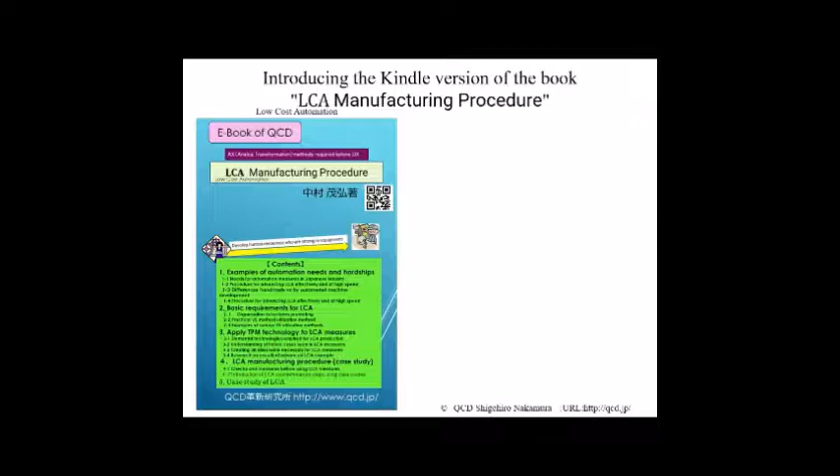Currently, DX and IoT measures are active at many companies. By making full use of advanced AI technology, it has become extremely easy to automate the labor that engineers used to make in factories. However, there are some cases where advanced expensive automation equipment, product and technology support, size and maintenance are not flexible, and it costs a lot.

On the other hand, the LCA countermeasure approach, as AX, analog transformation, is performed using the manufacturing mechanism and basic principles, and since it is based on the basics of manufacturing technology, there are few problems with DX and IoT countermeasures. In particular, I expect that it will be widely used because it is an effective approach for human beings to strengthen our analytical ability and creativity in product manufacturing.

At this time, Mr. Shigehiro Nakamura has published a Kindle book on this aspect, so I would like to introduce the main points.

This figure shows the result of a survey of management issues introduced by JMA at the end of 2021 in the issues of the production department. As you can see, first place is quality, 35.4%. Second place is IoT-related measures, 30.0%, fourth place is improvement of production technology development capability,

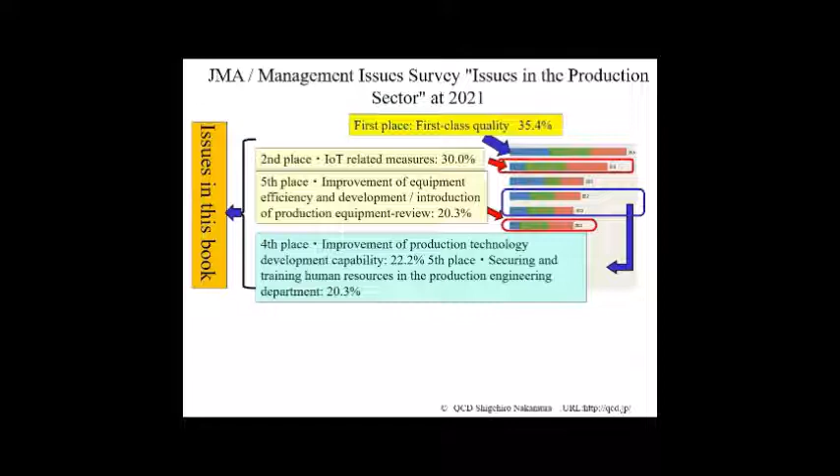22.2%. Fifth place is securing and training human resources in the production engineering department, 20.3%. Fifth place is improvement of equipment efficiency and development/introduction of production equipment review, 20.3%. This survey reveals a high need for automation and equipment measures in the manufacturing industry.

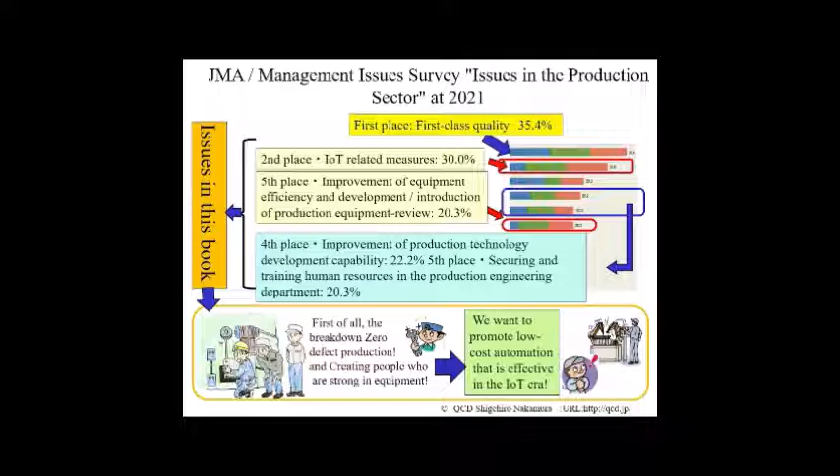At conveyor belt sushi shops, peeling of onions is also active in a similar manner. The inexpensive automatic machine Tamajiro, about $200, that processes onions in about 4.2 seconds is a facility developed by Mr. Jiro Kobayashi, the chairman of the famous Western food chain Kitchen Jiro in Japan.

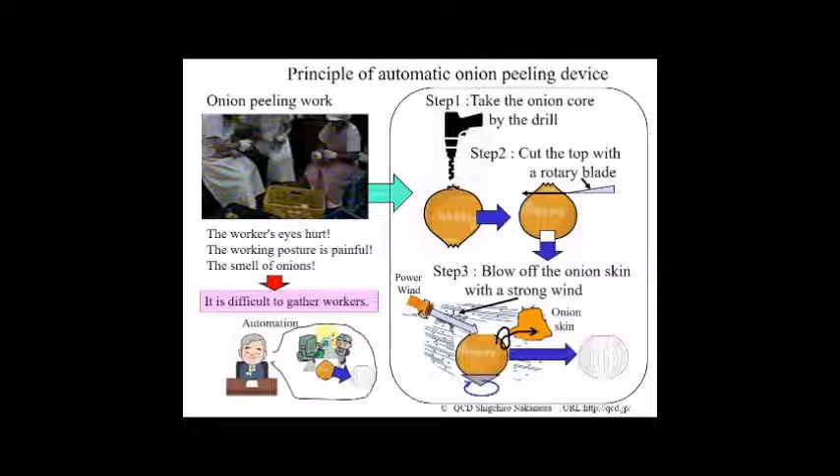The development of this onion peeling machine was a great deal of work because it was done by a complete amateur. For details of this development, please refer to the book, and the procedure for developing this kind of equipment in a shorter period of time and at low cost is introduced in the book.

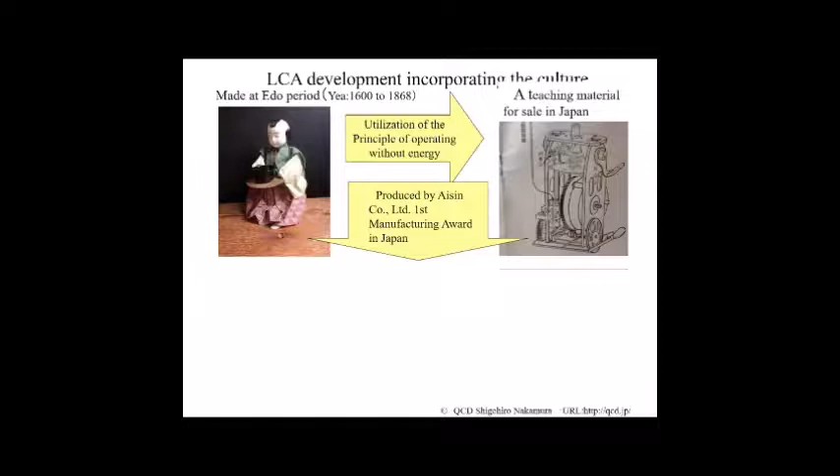The case of Aisin Company, Limited, which is especially famous, is introduced in this figure. This transfer robot is an example of using the principle of making a theater robot during the Edo period in Japan from 1600 to 1868. Using the gravity of the product, load energy is stored in the spring to rotate the wheel. Therefore, we do not use motors. The LCA book also includes this detailed analysis.

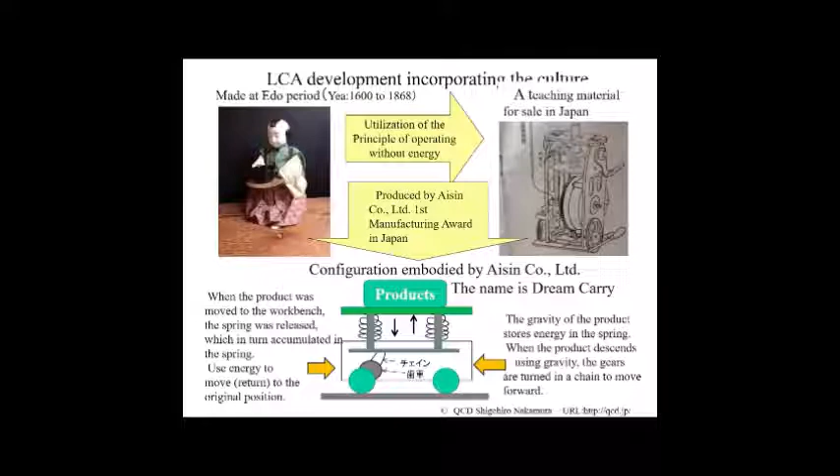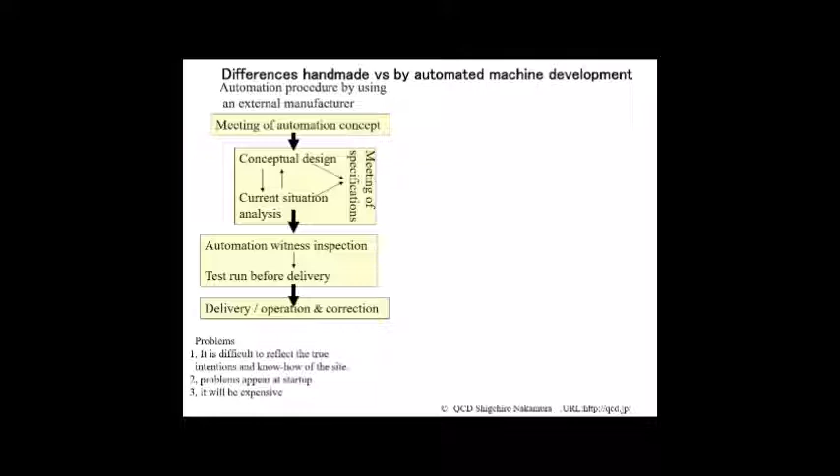The left side of the figure is a method of introducing and applying automatic machines while meeting with specialized manufacturers. However, a company may have reasons against it, for example, there is a problem in terms of protecting in-house know-how, or it will not be useful for in-house human resource development for future low-cost automation. Based on such comparisons, I was promoting low-cost automation in many companies.

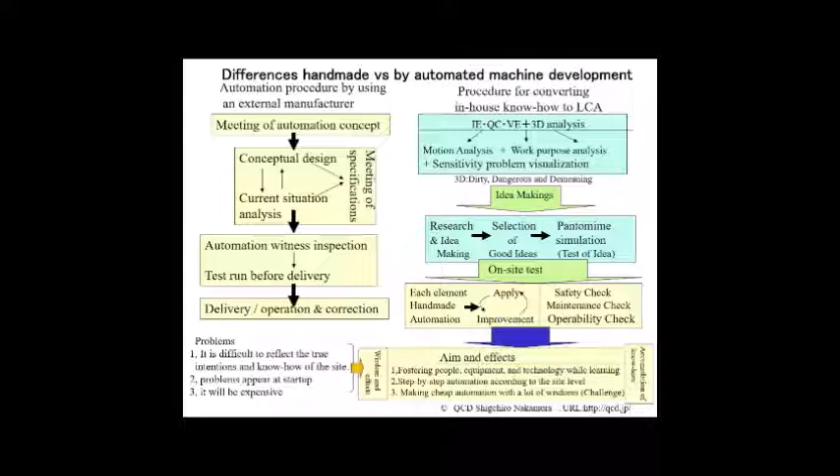The LCA procedure of the book is on the right side of the figure. The LCA procedure is shown in this figure. The LCA review process is from left to right in the figure. First, we have to ask, is it necessary to convert to LCA? Some targets do not require LCA measures.

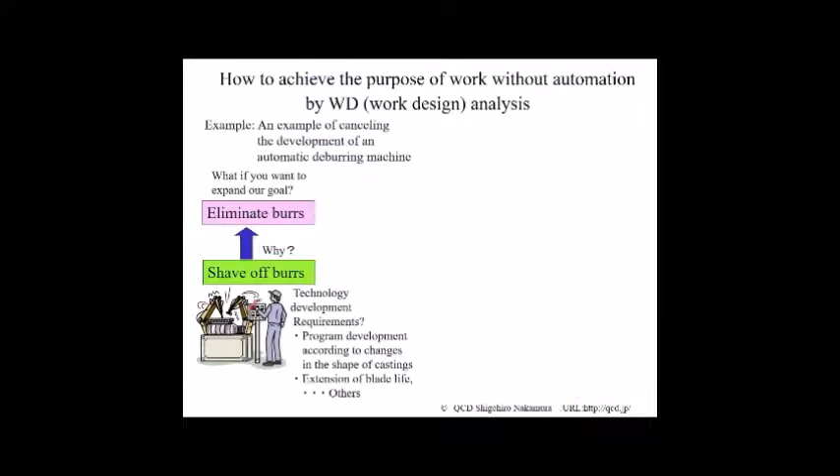For example, if you want to deburr castings, and if you can make a burr-free casting by improving the accuracy of the mold, you will not need to build an automated deburring facility. As a similar measure, there are cases where integral molding of assembled products and powder metallurgy do not require automation of cutting of metal products. Mold production for mobile phones is already made by powder metallurgy. This kind of countermeasure is done by the work design method, and the book introduced some famous cases.

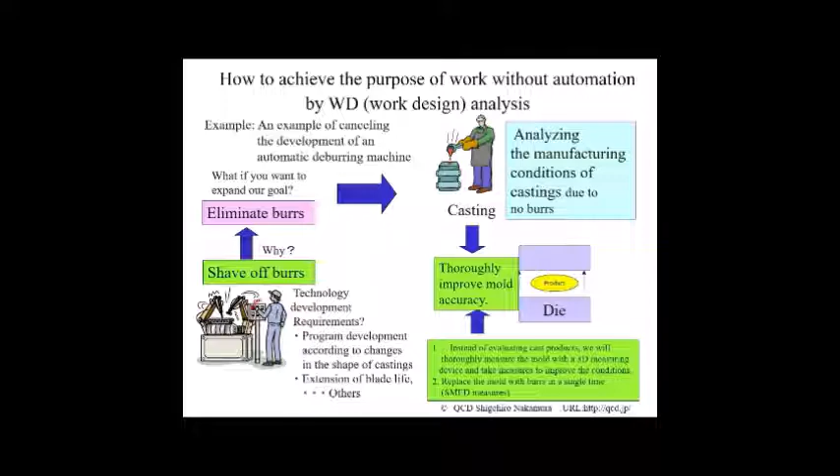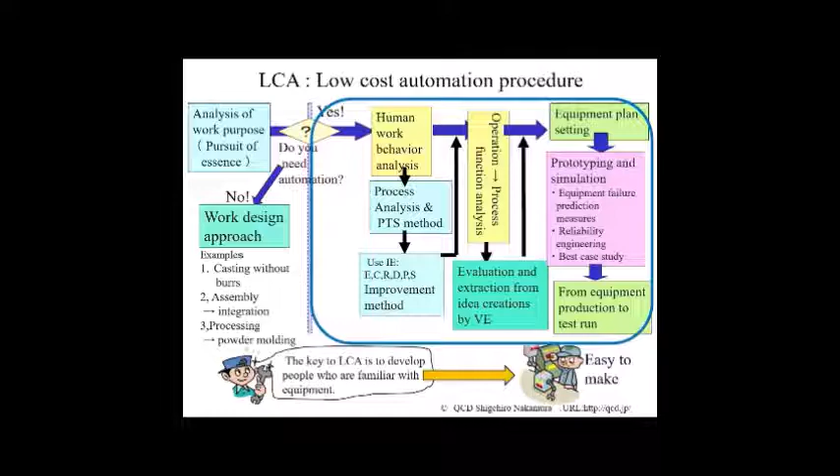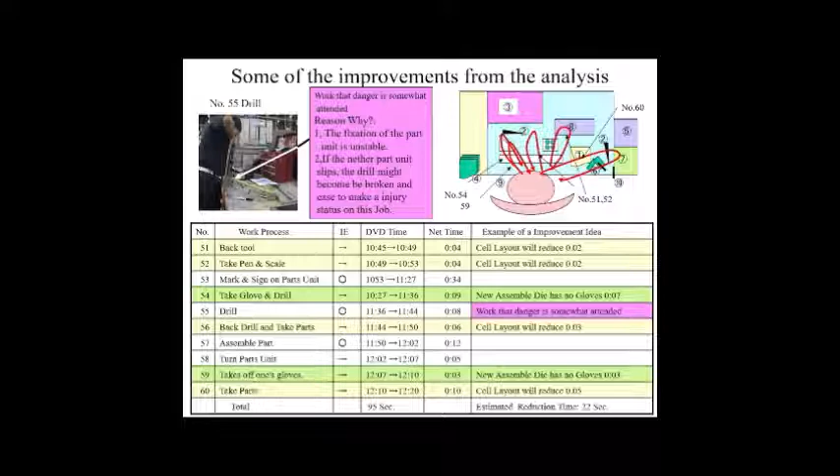This time, if LCA measures are required, we will proceed with the analysis on the right side of the diamond of this figure. And it is the LCA procedure. The first procedure for LCA measures is process analysis and operation analysis as shown in this figure. At the same time, we have to improve the target work drastically by using this analysis.

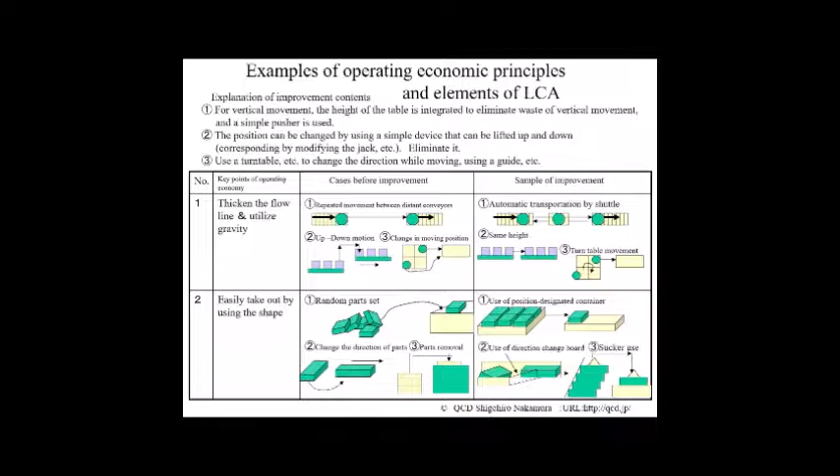Please refer to the examples in this table when you have a chance to use the elemental technologies of automation shown in this table with thorough motion analysis for the target work. This photo is one of the examples of LCA measures. You can see a concrete example of the situation where you are checking the work procedure by the pantomime method with the detailed usage of process analysis and the YouTube video using the book.

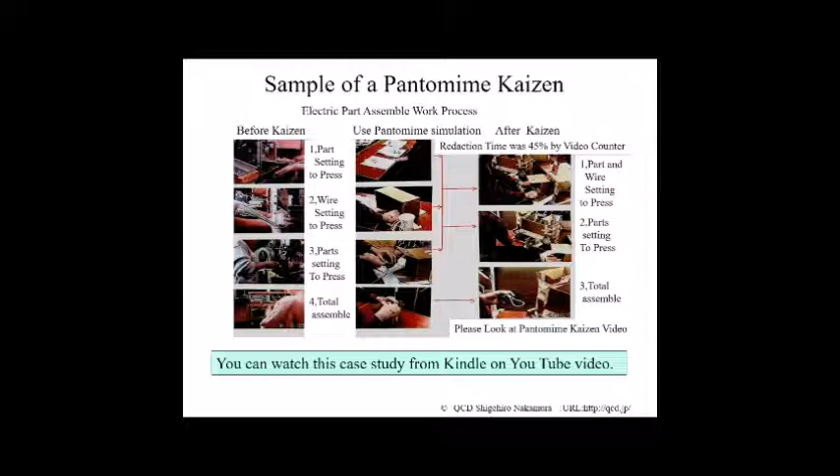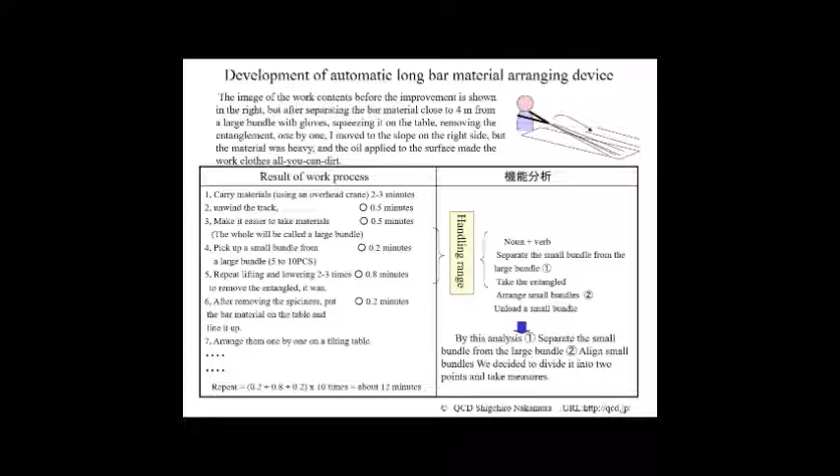I would like to introduce the development of an automatic arrangement device for bar materials that I was involved in. The subject was the work of arranging bar materials more than 4 meters long in equipment, as shown in the upper part of this figure. Since it was exactly 3D work for precision processing, many people have been working on equipment development. However, the development of this device has been carried out by many engineers for the past 10 years, but all have failed. Therefore, they proceeded with such an analysis.

At that time, the author organized a project team of 1 young employee for equipment maintenance and 2 people who are in charge of this work at the manufacturing site but do not know the equipment at all, and I presented the LCA procedure and introduced it to them. After functionally analyzing the process, everyone used the idea search method shown in the book. This is a technical countermeasure element that was a hint of the idea and countermeasure technology obtained at that time.

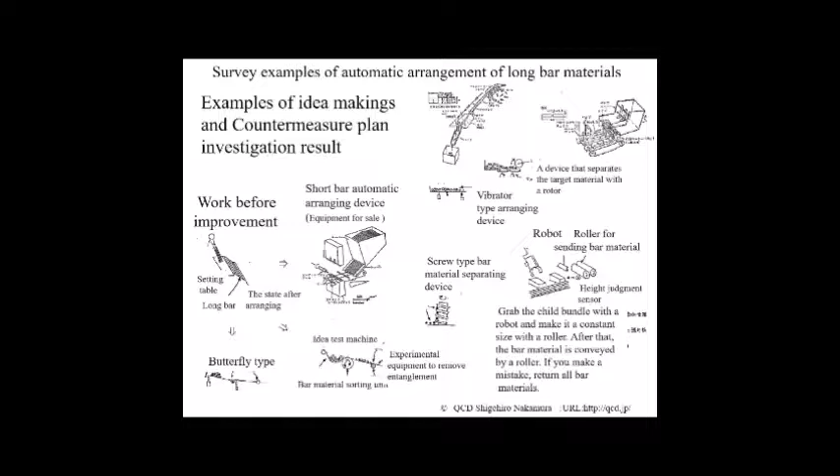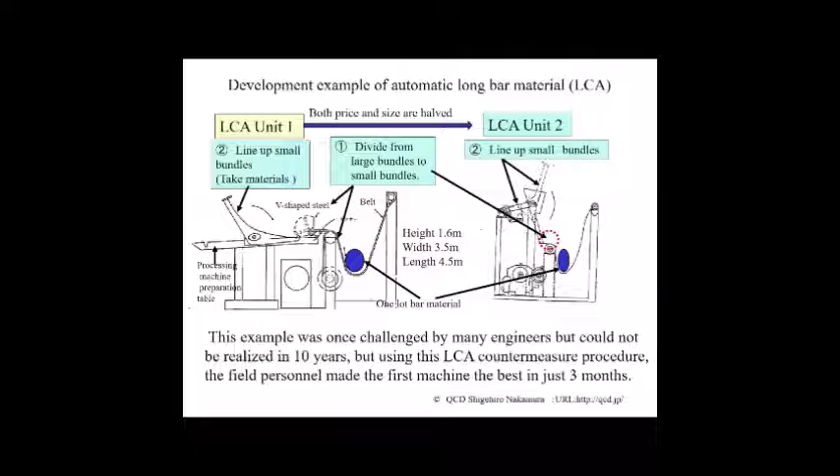This project member also used the VE method with Unit 1 as a model to realize Unit 2 at half the size. As a result, we were able to successfully complete LCA Unit 1 in 3 months. The reason why these people succeeded in LCA measures was the procedure for LCA measures this time. Since then, Mr. Nakamura has achieved similar results in many companies, so this book summarizes that know-how. I hope you find this book useful.